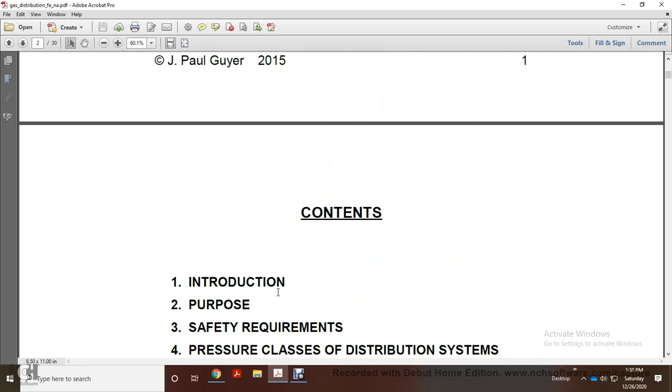The contents of this intro to gas distribution: introduction, purpose, safety requirements, pressure classes of distribution systems, system planning, materials and equipment, miscellaneous plans and engineering data, gas distribution systems design.

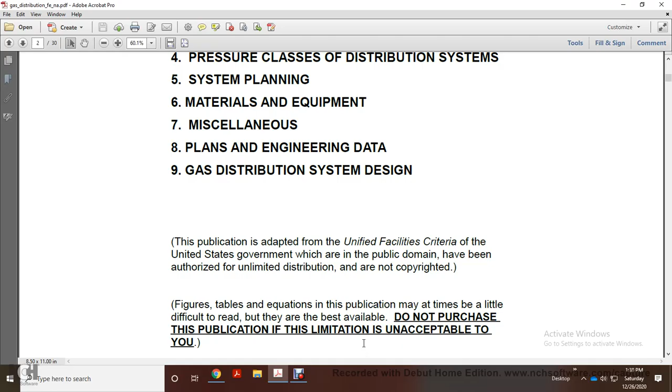This public document is adapted from Unified Facilities Criteria of the United States Government, public domain, authorized for unlimited distribution and not copyrighted. The tables, equations, publications are many times a little difficult to read, but they are the best available. Do not purchase this publication if this limitation is unacceptable to you.

Introduction: this publication contains instruction and engineering information relating to gas distribution piping systems, including pressure regulators, valves, meters, and other necessary appurtenances for the distribution of fuel gas, natural and manufactured, from the point of delivery by the gas supplier to the point of connection with the building piping.

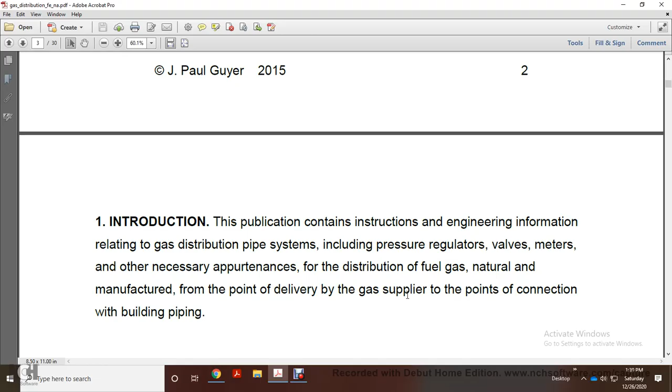2. The purpose: the guidance furnished is for designing a new gas distribution system, checking the adequacy of the design furnished by the gas suppliers, or analyzing an existing system to determine the adequacy of supplying the demands of proposed additions.

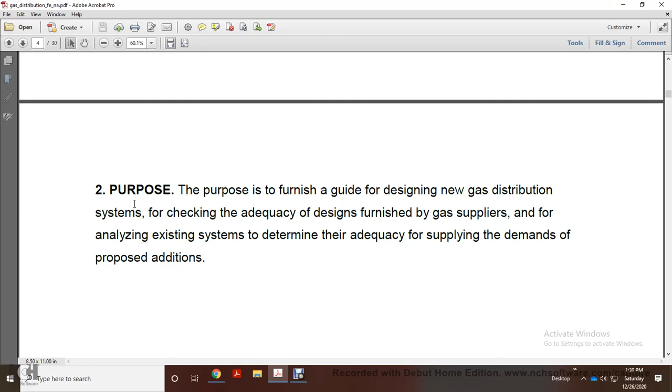Alright, 3. Safety requirements. The design will include safety requirements of ANSI B31.8, including guidance for abandoned gas lines. The requirements of ANSI B31.8 are adequate for safety under conditions normally encountered in the gas industry. Requirements for abnormal and unusual conditions cannot be specifically provided in this publication, nor all the details of engineering prescribed.

Alright, 4. Pressure class of the distribution system. Low pressure system. In a low pressure gas distribution system, the gas pressure in the mains and service lines is substantially the same as that delivered to the user appliances. In such a system, service regulators are not required for the individual service lines. So, once again, your low pressure system is a gas distribution system with the mains and service lines substantially the same as delivered to the using appliances. In such a system, the service regulator is not required on individual service lines.

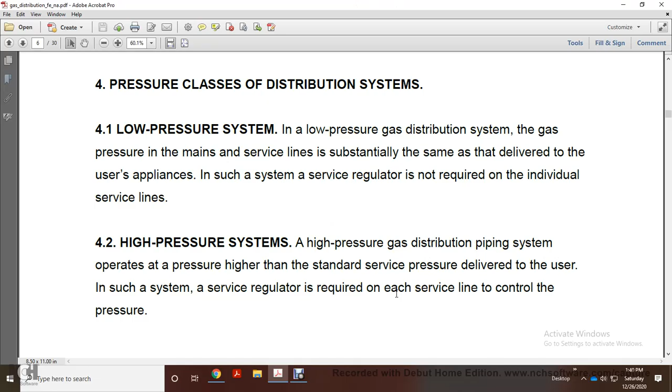High pressure system. A high pressure gas distribution system operates at a pressure higher than the standard service pressure delivered to the user. In such a system, a service regulator is required on each service line to control the pressure.

Alright, 5. System planning layout. The gas distribution system will be planned carefully with due consideration to economy, safety, and uniformity of pressure. The lines will be well looped in the main area and outlying areas whenever practical and economically feasible to do so. It's not always practicable to loop a supply line to an outlying area and then back into the main system, but in such cases, the objectionable effects of dead ends can often be relieved to some extent by looping such a line around the area served and then back into itself.

At a large station it will usually be advantageous to extend the high pressure line to provide 2 or more connections with distribution lines for the purpose of uniformity and assurance of adequate pressure.

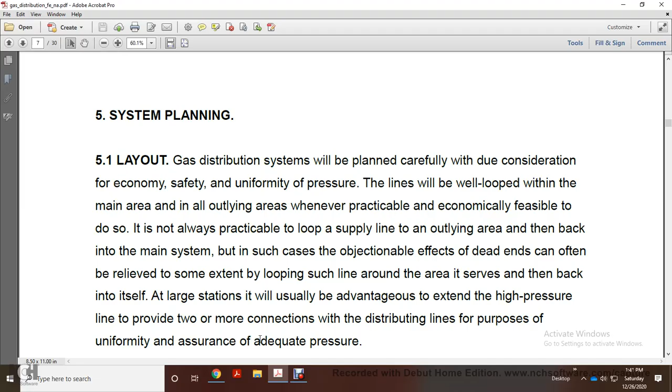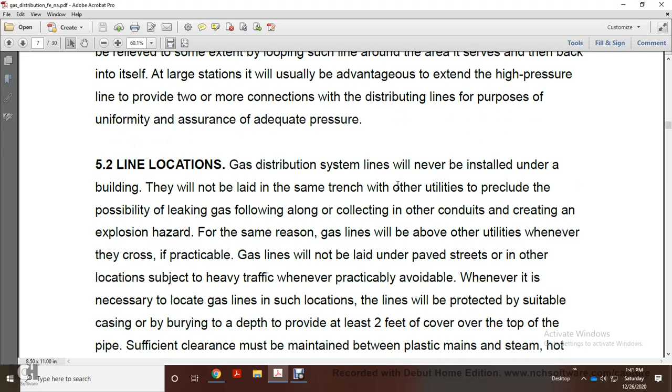5.2. Line locations. Gas distribution system lines will never be under a building. They will never be laid in the same trench with other utilities, precluding the possibility of leaking gas following along and collecting in other conduits, creating an explosive hazard. For the same reason, gas lines will be above other utilities whenever they cross.

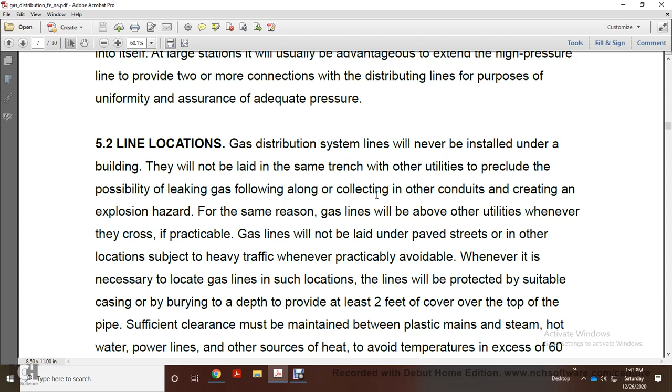If practical, gas lines will not be laid under paved streets or in any other location subject to heavy traffic. Whenever it is necessary to locate gas lines in such a location, lines will be protected with a suitable casing or buried to a depth providing at least 2 feet of cover over the top of the pipe.

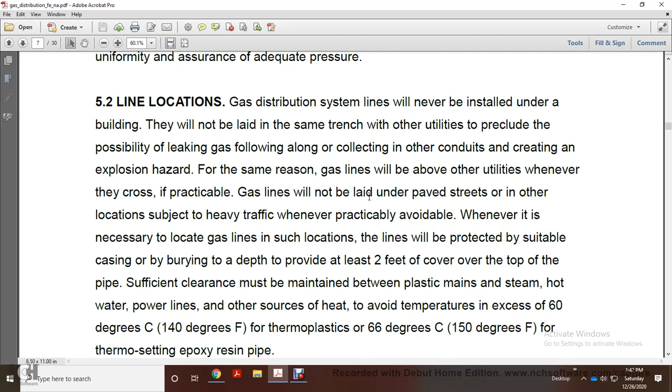Sufficient clearance must be maintained between plastic lines and plastic mains and steam, hot water, power lines, and other sources of heat to avoid temperatures in excess of 60 degrees Celsius, which would be 140 degrees Fahrenheit, for thermoplastics, and 66 degrees Celsius, 150 degrees Fahrenheit, for thermosetting epoxy resin pipe.

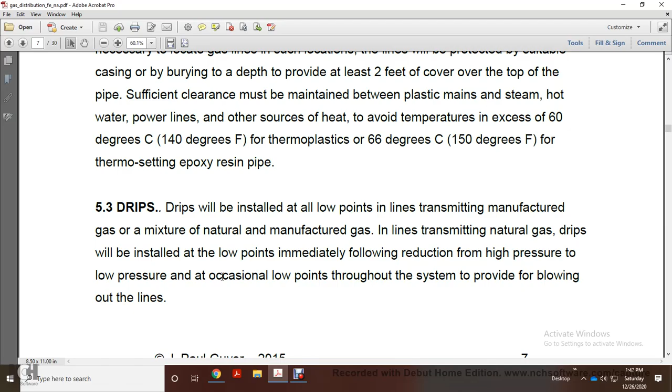Occasional low points throughout the system will be provided for the blowing out of the lines. Alright, 5.4, grading lines. Gas mains will be buried deep enough to provide at least 2 feet of cover over the top of the pipe.

When manufactured gas is used, the lines will be uniformly graded to drain low points, preventing formation of pockets where condensate could restrict the flow of gas. Lines transmitting natural gas need not be graded, but may follow the contour of the ground surface.

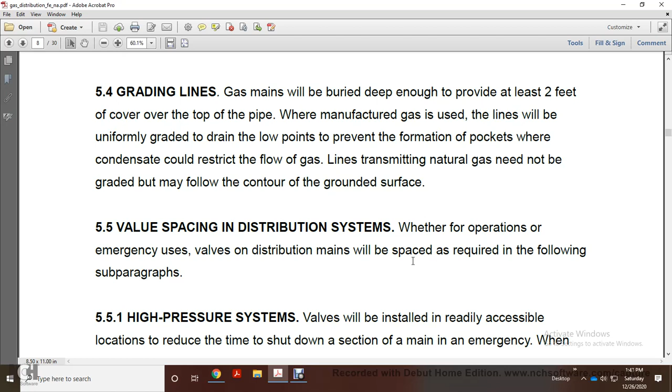5.5, valve spacing in distribution systems. For operation and emergency use, valves on distribution mains will be spaced as required in the following subparagraphs. 5.5.1, high pressure systems. Valves will be installed in readily accessible locations to reduce the time of shutdown of a section of the main in an emergency. When determining spacing of the valves, consideration should be given to the operating pressure.

When determining spacing of the valves, consideration should be given to the operating pressure and size of the mains and local physical conditions, as well as the number and type of users or services affected by a potential shutdown. Alright, 5.5.2, low pressure systems. Valves are required in a low pressure system only to meet conditions given in paragraph 1.6 below.

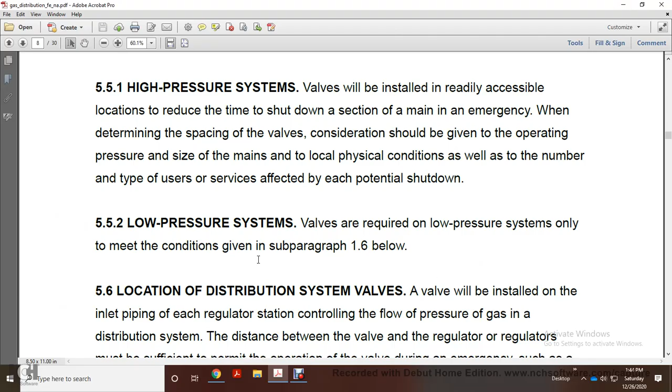5.6, location of distribution system valves. A valve will be installed on the inlet piping of each regulator station controlling the flow or pressure of the gas in a distribution system. Distance between the valve and the regulator or regulators must be sufficient to permit operation of the valve during an emergency, such as a large gas leak or fire in the regulator station.

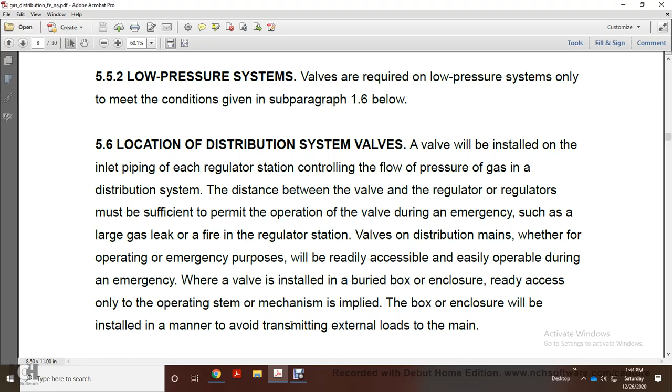Valves on distribution mains, whether for operating or emergency purposes, will be readily accessible and easy to operate during an emergency. When the valve is installed and buried in a box or enclosure, ready access to the operating stem and mechanism is implied. The box or enclosure will be installed in a manner to avoid transmitting external loads to the main.

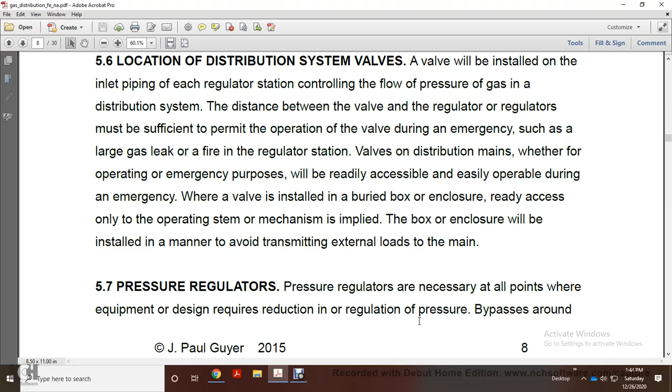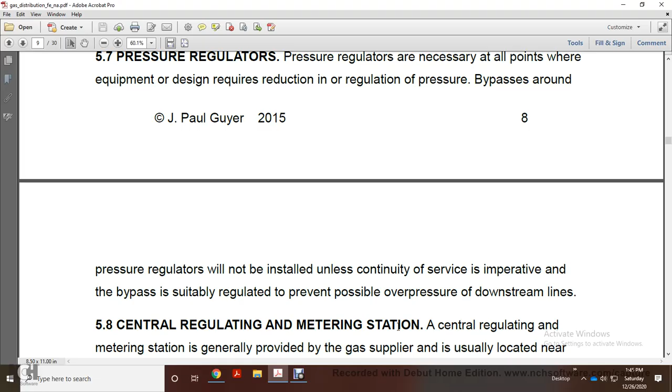5.7, pressure regulators. Pressure regulators are necessary at all points wherever the equipment design requires reduction and regulation of pressure. Bypasses around pressure regulators will not be installed unless continuity of service is imperative, with the bypass suitably regulated to prevent possible overpressure of the downstream lines.

Alright, 5.8, central regulating and metering station. The central regulating and metering station is generally provided by the gas supplier, usually located near the entrance of the reservation. When provided by the owner, all necessary equipment will comply with the requirements of the gas supplier, and the enclosure, if required, will be of fire-resistant construction such as masonry. Adequate provisions will be made for ventilation, with the enclosure design coordinated with the using agency. A gas supplier valve may be installed in the main supply line approximately 100 feet ahead of the station.

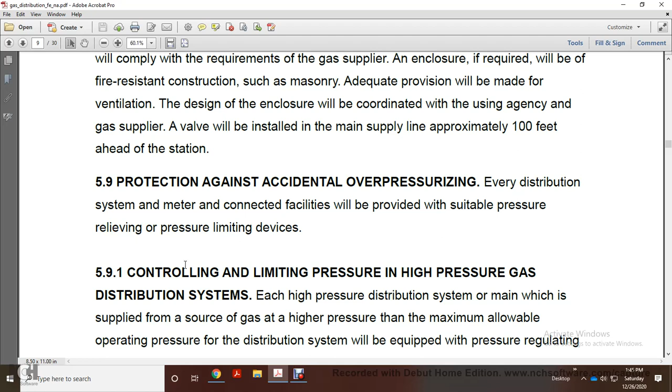5.9, protection against accidental overpressurizing. Every distribution system or meter of the connected facility will be provided with a suitable pressure relieving or pressure limiting device. 5.9.1, controlling and limiting pressure in high pressure gas distribution systems. Each high pressure distribution main which is supplied from a source of gas at higher pressure than the maximum allowable operating pressure of the distribution system will be equipped with a pressure regulating device of adequate capacity, designed to meet the pressure, load, or other service conditions under which it may operate or be subjected.

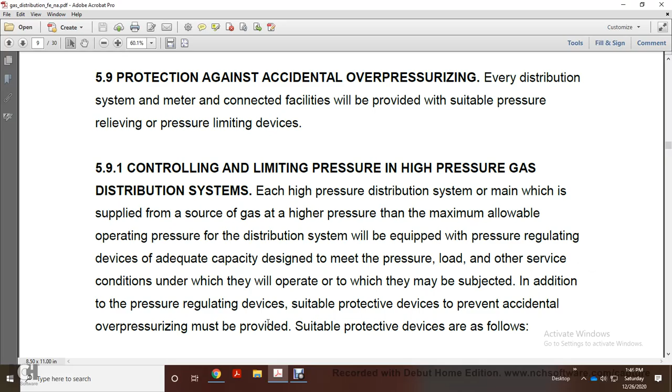In addition to the pressure regulating device, a suitable protective device to prevent accidental overpressuring must be provided. Suitable protective devices are as follows: spring-loaded relief valves conforming with the American Society of Mechanical Engineers Boiler and Pressure Vessel Code, Section 8, Division 1. Pilot-loaded back pressure regulators used as relief valves, designed so that failure of the pilot system or control line will open the regulator.

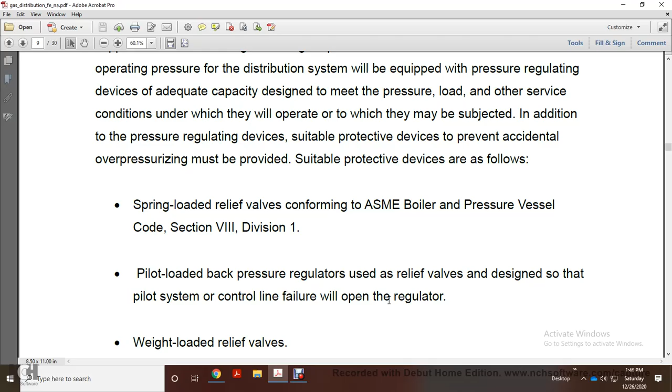Weight-loaded relief valves. A monitoring regulator installed in series with the primary pressure regulator. A series regulator installed upstream of the primary regulator so as to continuously limit the pressure on the inlet of the primary regulator to the maximum allowable operating pressure of the distribution system or less. An automatic shut-off device installed in series with the primary pressure regulator, set to shut off when the pressure of the distribution system reaches the maximum operating pressure or less.

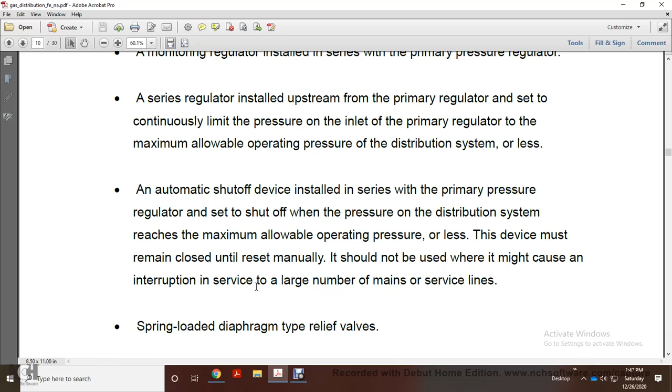The device must remain closed until reset manually. It should not be used if it might cause an interruption of service to a large number of mains or service lines. Spring-loaded diaphragm type relief valves.

Alright, 5.9.2, controlling and limiting pressure in low pressure gas distribution systems. Each low pressure main supplied from a gas source at higher pressure than the maximum allowable operating pressure for a low pressure system will be equipped with a pressure regulating device of adequate capacity. Other devices will be designed to meet the pressure, load, and other service conditions in which they may operate.

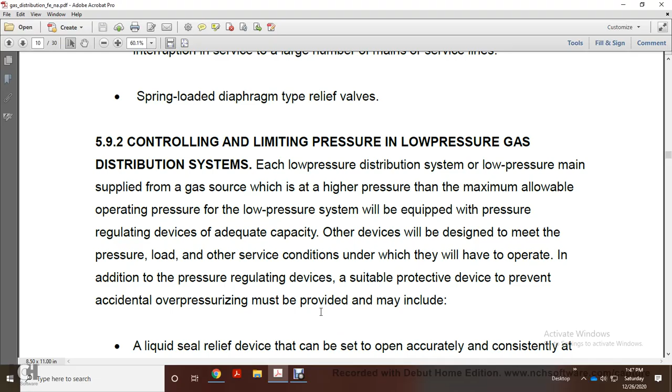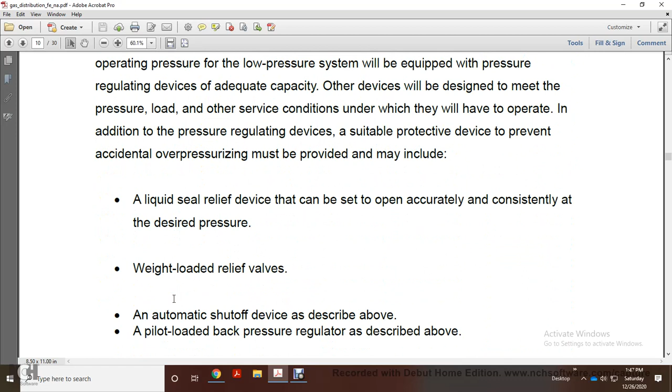In addition to the pressure regulating device, a suitable protective device to prevent accidental overpressuring must be provided and may include: a liquid seal relief device that can be set to open accurately and consistently at the desired pressure, weight-loaded relief valves, the automatic shut-off valve described above, pilot-loaded back pressure regulators described above, monitoring regulators described above, and series regulators as described above.

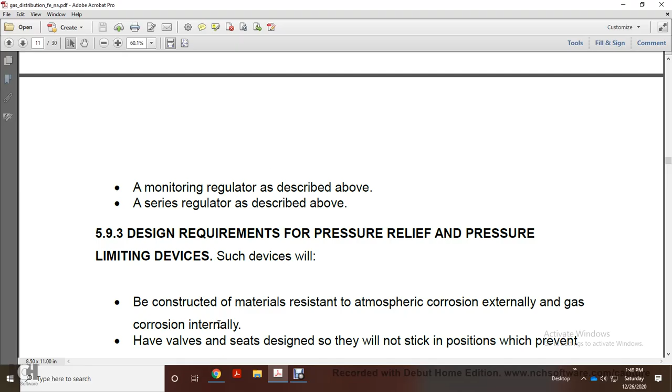5.9.3. Design requirements for pressure relief devices and limiting devices. Such devices will be constructed of materials resistant to atmospheric corrosion externally and gas corrosion internally. They will have valves and seats designed so they will not stick in positions which prevent the device from operating properly. They may be designed and installed with ease of maintenance for checking leakage, pressure rate, actuation, and free valve movement.

5.9.4. Telemetering and recording gauges. 5.9.4.1: each distribution system supplied by more than one district pressure regulating station must be equipped with telemetering recording pressure gauges to indicate the gas pressure in the district line.

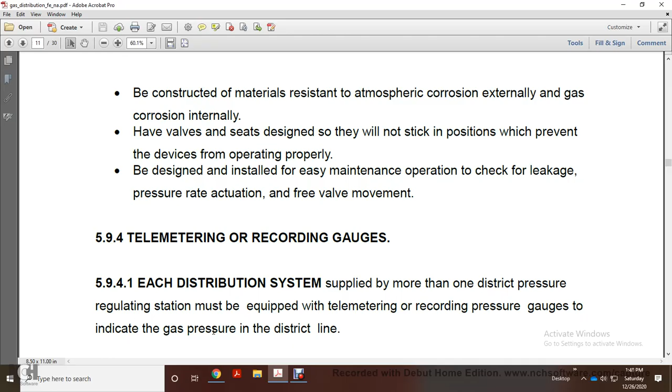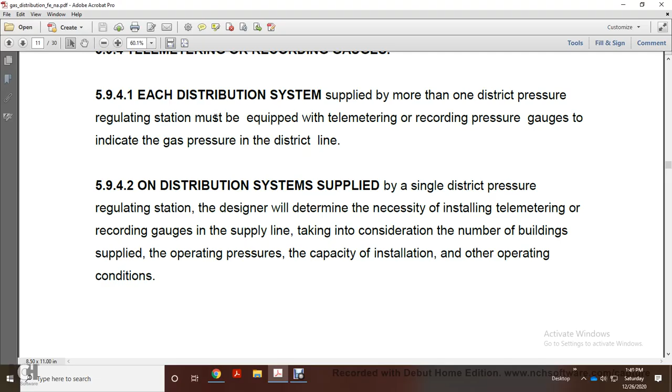5.9.4.2: on a distribution system supplied by a single district pressure regulating station, design should determine the necessity of installing a telemetering recording gauge on the supply line, taking into consideration the number of buildings, supply operating pressure, capacity, installation, and other operating conditions.

6. Materials and equipment. General requirements: materials and equipment that become permanent components of the gas distribution system must be suitable and safe for the conditions of the locality in which they are installed. The minimum components will meet the requirements of Title 49 Code of Federal Regulations 192.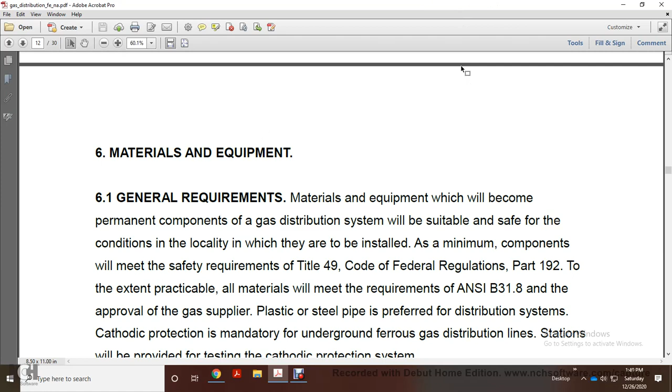To the extent practical, all materials will meet the requirements of ANSI B31.8 and have the approval of the gas supplier. Plastic or steel pipe is preferred within the distribution system. Cathodic protection is mandatory for underground ferrous gas distribution lines. Stations will be provided for testing the cathodic protection system.

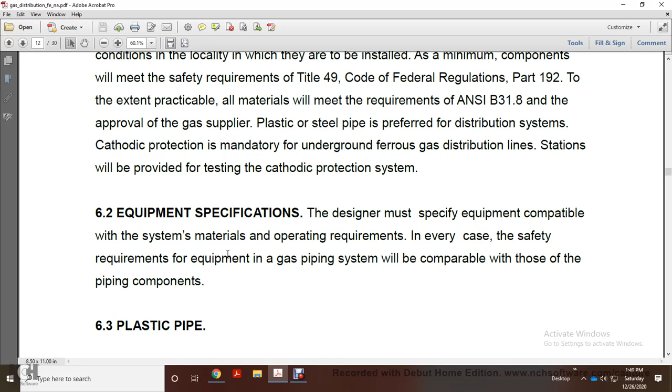6.2 Equipment specifications: the designer must specify equipment compatible with the specific system materials and operating requirements in every case. Safety requirements for the equipment of the gas piping system will be comparable with those of the piping components.

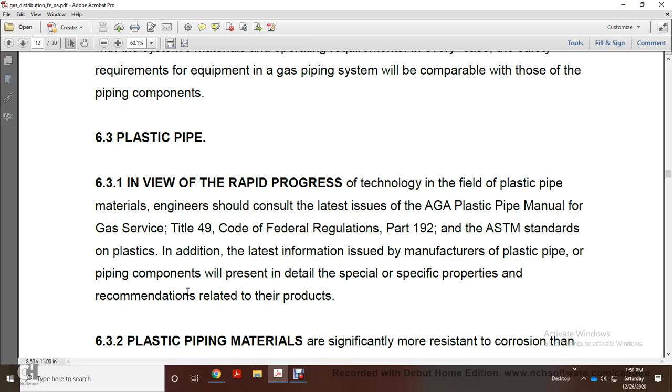6.3 Plastic pipe: in view of the rapid progress of technology in the field of plastic pipe materials, engineers should consult the latest issue of the AGA Plastic Pipe Manual for Gas Service, Title 49 Code of Federal Regulations Part 192, and ASTM Standards on Plastics. In addition, the latest information issued by the manufacturer of plastic pipe and piping components should be consulted for specific properties and recommendations related to the products.

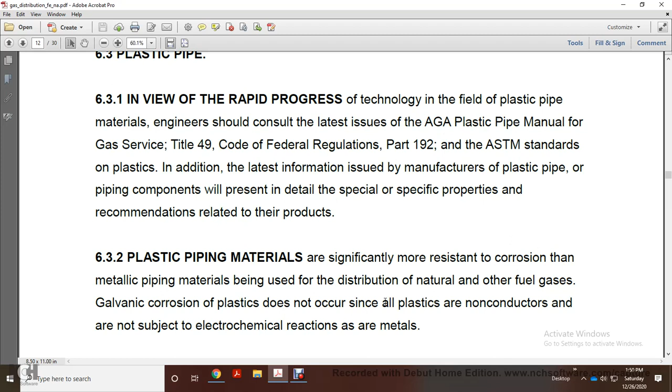6.3.2. Plastic piping materials are significantly more resistant to corrosion than metallic piping materials used in distribution of natural and other fuel gases. Galvanic corrosion does not occur in plastic since all plastics are non-conductors and are not subject to electrochemical reactions as metals are.

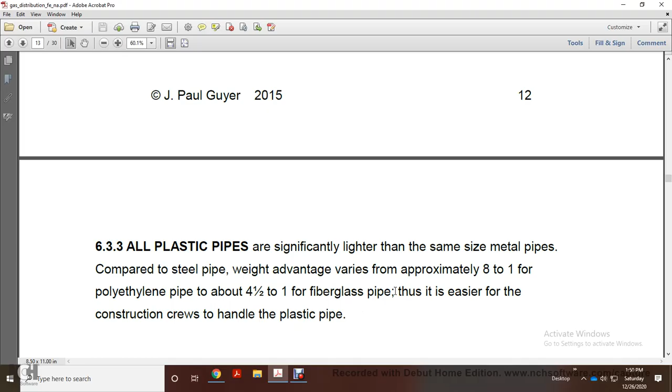6.3.3. All plastic pipes are significantly lighter than the same size metal pipe. Compared with steel pipe, the weight advantage varies approximately 8 to 1 for polyethylene pipe and about 4.5 to 1 for fiberglass pipe, making it easier for construction crews to handle the plastic pipe.

7. Miscellaneous. 7.1 Odorization: a suitable malodorous agent is injected into any gas which does not possess a natural distinctive odor, for the purpose of detecting leaks. Unless the gas supply line has already been odorized by the gas supplier, it will be necessary to provide facilities for injecting malodorant.

A storage tank with a control device injecting the odorization agent at a rate proportional to the gas flow, determined by pressure drop across an orifice, will be required. The point of injection will be on the downstream side of the central regulating metering station. Recommendations can usually be obtained from the gas supplier regarding the type and quantity of malodorant for use in the suitable injection system.

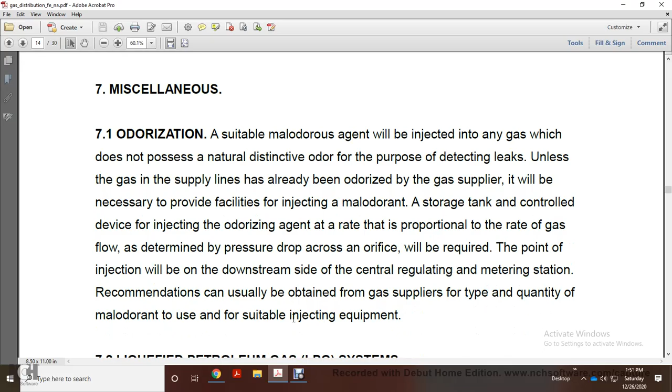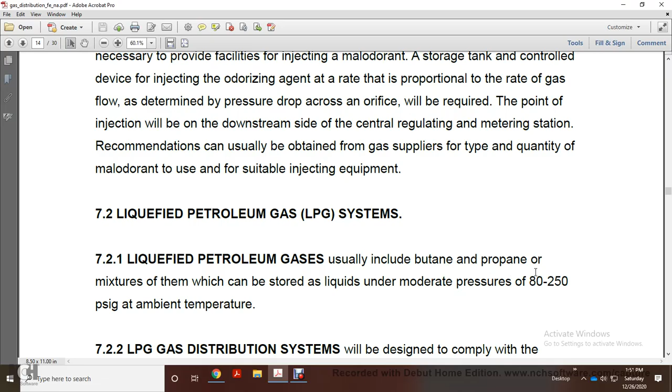7.2 Liquefied petroleum gas, or LPG, systems. Liquefied petroleum gas usually includes butane, propane, or a mixture of them, which can be stored as a liquid under moderate pressures of 80 to 250 psig at ambient temperature.

Liquefied petroleum gas distribution systems are designed to comply with the requirements of the National Fire Protection Association 58, instead of ANSI B31.8. Polyethylene and fiberglass will not be used in liquefied petroleum gas systems.

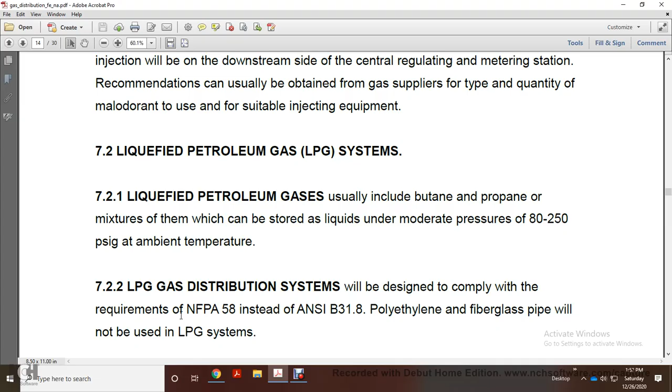8. Plans and engineering data. Plans will include layout drawings showing the entire distribution system, detailed drawings clearly showing pipe size, locating gas mains, service connections, details, abandoning pipes, valves, and regulators.

ANSI B31.8 requires abandoned gas lines to be physically disconnected from the gas sources. Shut-off valves are not an acceptable means of disconnection.

8.2 Engineering analysis: the engineering analysis will be in diagram form showing all connected loads, flow quantities, pressure, and location of regulators. Supporting calculations will be prepared as needed.

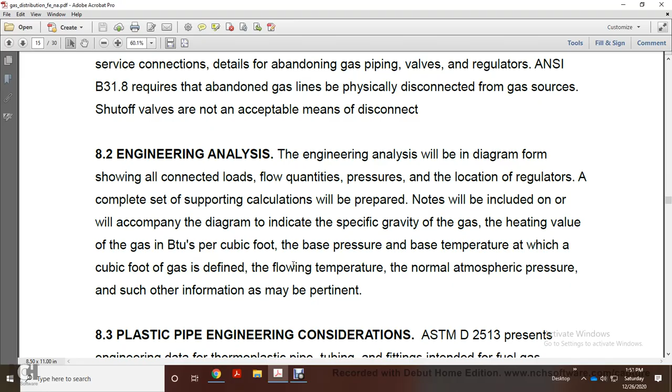Notes will be included on, or will accompany, the diagram indicating the specific gravity of the gas, heating value of the gas in BTUs per cubic foot, base pressure, base temperature at which the cubic foot of gas is defined, the flowing temperature, the normal atmospheric pressure, and such other information as may be pertinent.

8.3 Plastic pipe engineering consideration. The American Society for Testing and Materials D2513 presents engineering data for thermoplastic piping, tubing, and fittings intended for fuel gas service.

The American Society for Testing and Materials D2517 presents engineering data for fiberglass pipe and fittings, including adhesive joints, for fuel gas service. The ASTM D3350 covers the identification of polyethylene plastic pipe and fittings materials using a cell classification system.

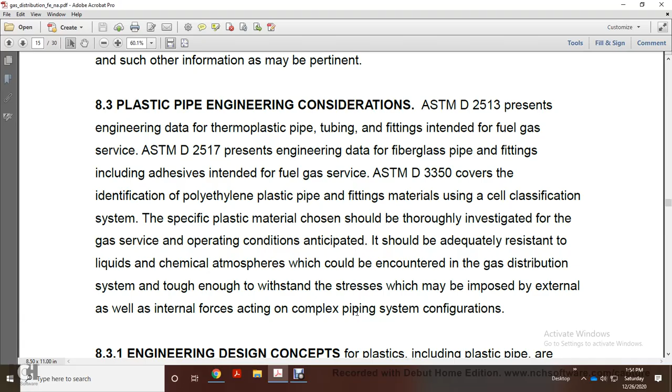The specific plastic material should be thoroughly investigated for the gas and the operating conditions anticipated. It should be adequately resistant to liquid and chemical atmospheres which could be encountered within the gas distribution system, and tough enough to withstand stresses which may be imposed by external as well as internal forces acting on complex piping system configurations.

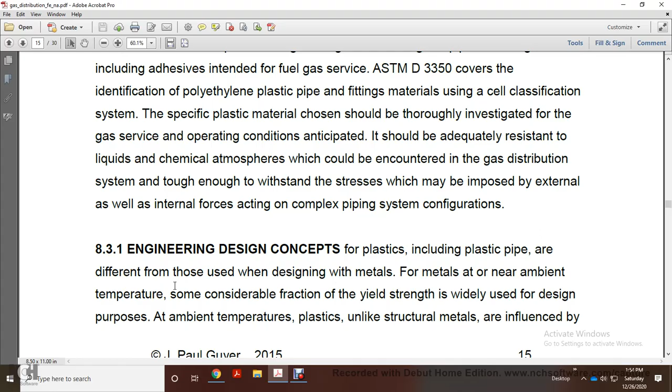8.3.1, Engineering Design Concept. Plastic pipes differ from those used when designing with metals. For metals at ambient temperature, some considerable fraction of the yield strength is widely used for design purposes. At ambient temperature, plastics, unlike structural metals, are influenced by duration of stress, with relatively small changes in temperature.

Therefore, the design stress level of plastics is based on long-term strength, measured by plotting stress versus failure as a function of time at constant temperature. On a short-term strength basis, the design stress level for plastics would be relatively low.

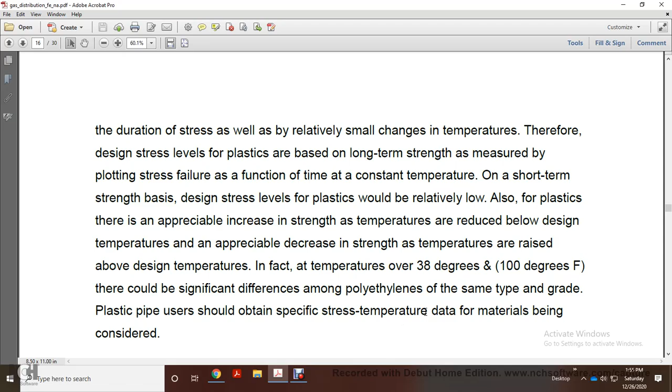Plastics show appreciable increased strength as temperature is reduced below the design temperature, and an appreciable decrease in strength as temperatures are raised above the design temperature. At temperatures over 38 degrees or 100 degrees Fahrenheit, there could be significant differences among polyethylenes of the same type or grade. Plastic pipe users should obtain specific stress-temperature data for the material being considered.

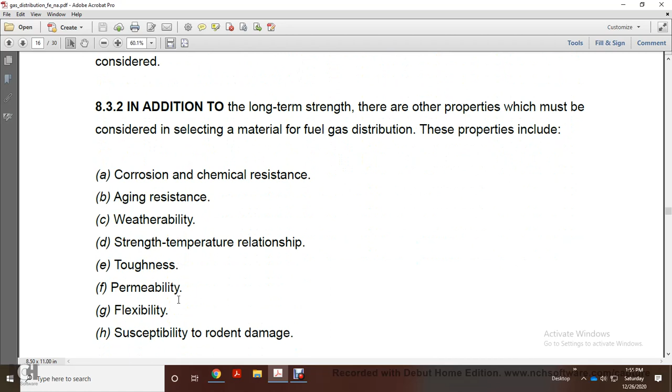8.3.2. In addition to long-term strength, there are other properties which must be considered when selecting material for fuel gas distribution. These properties include corrosion, chemical resistance, aging resistance, weatherability, strength-temperature relationship, toughness, permeability, flexibility, and susceptibility to rodent damage. With all these properties important, it must be considered that only the long-term strength can be defined well enough at present to be used as the primary basis for design.

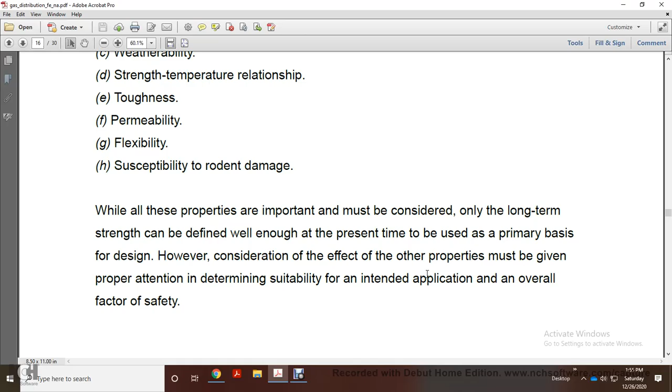However, consideration must be given to the other properties with proper attention, to determine suitability for the intended application and the overall factor of safety.

8.3.3. When selecting a plastic piping system, the design engineer should relate the installation and service requirements to the characteristics of the several plastic systems available.

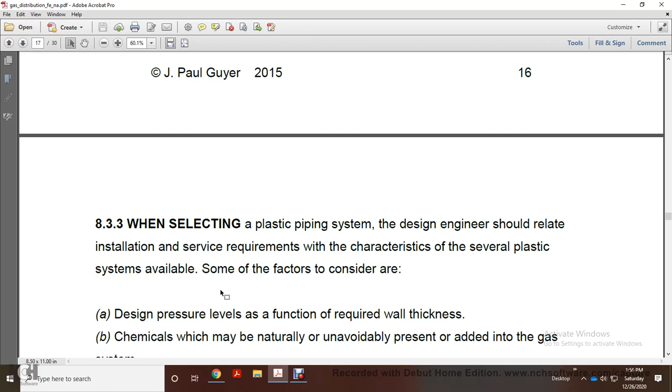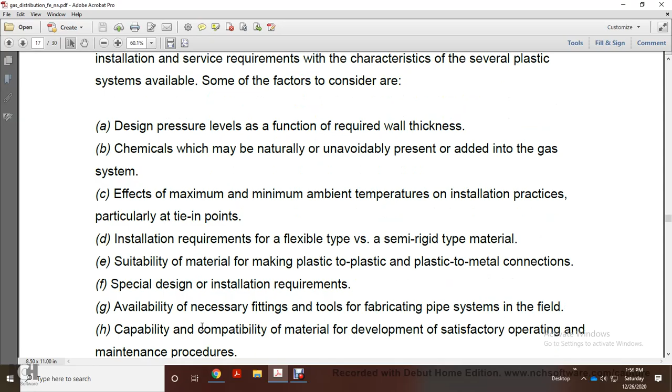Some factors to be considered are: design pressure level, the function required, wall thickness, chemicals which may naturally be present or added into the gas system, maximum and minimum ambient temperature effects, installation practices particularly at tie-in points, installation requirements, flexible type versus semi-rigid type material, suitable material for making plastic-to-metal connections, special design or installation requirements available, necessary fittings and tools for fabricating the piping system in the field, compatibility of the materials, and satisfactory operation and maintenance procedures.

9. Gas Distribution System Design. Introduction: The design of the gas distribution system will be based on the maximum probable demand, equivalent to not less than 80% of the full maximum possible connected appliance load. Actual consumption may never be equal to the maximum probable.

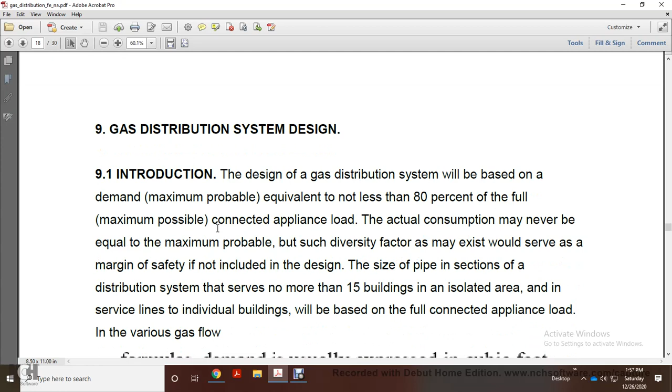Such a diversity factor may exist which would serve as a margin of safety, if not included in the design of the site or section, for a distribution system serving no more than 15 buildings in an isolated area. The service line to individual buildings will be based on the full connected appliance load and various gas flow.

The formula demand is usually expressed in cubic feet per hour.

Because of the variability of the volume of gas with changes in pressure and temperature, and the need for a finite basis, pressure and temperature must be expressed in quantities volumetrically, essentially defining the state characteristics of the gas. For computations connecting the appliance load with the flow formulas used for design of the piping system, all should be on the same basis, using base conditions of 60 degrees Fahrenheit and 14.73 psia, according to AGA Orifice Metering of Natural Gas Report Number 3.

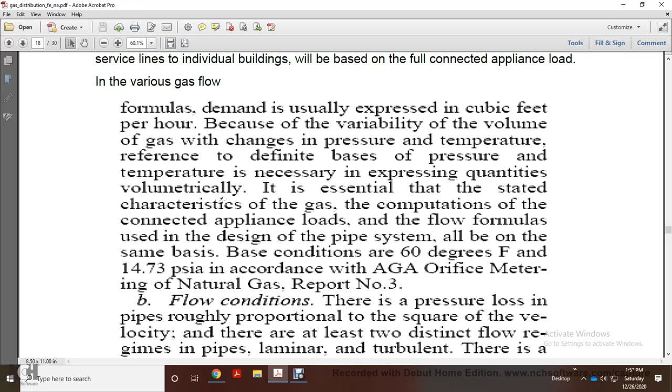Flow conditions: there is a pressure loss in pipes that is roughly proportional to the square of the velocity. And there are at least two distinct flow regimes in pipes: laminar flow and turbulent flow.

There is a distinctive discontinuity in the behavior of the fluid where laminar flow rates are exceeded, with a large region of mixed flow behavior. Partially turbulent flow exists between the upper limit of laminar flow and the onset of fully developed turbulent flow. The exact transition regions between the various flow regimes are not yet accurately predictable for various gas piping situations.

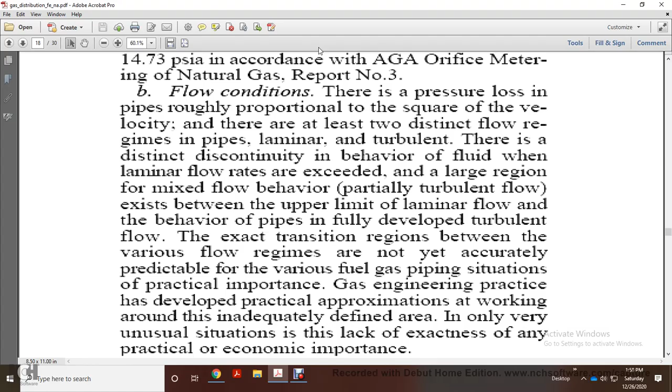For practical importance, gas engineering practice has developed practical approximations for working around this inadequately defined area. It is only in very unusual situations that the lack of exactness has any practical economic importance.

This is the basis for other military facilities with unpredictable loads. The most compelling problem with distribution system design is the infrequency of system operation at or near design capacity.

Regarding the flow of natural gas in pipelines: plastic pipes are very smooth, slippery surfaces with friction resistance considerably less than that of steel pipe. Therefore, it is often assumed that plastic pipe has significantly more flow capacity than steel pipe.

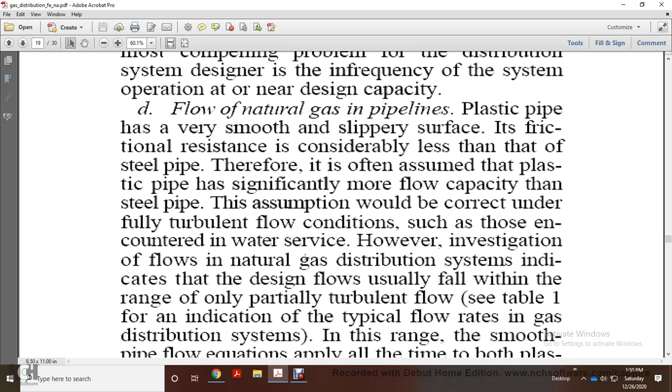This assumption would be correct under fully turbulent flow conditions, such as encountered in water distribution. However, natural gas distribution design flows usually fall within the range of only partial turbulent flow. See Table 1 for typical flow rates for gas distribution. In this range, the smooth-pipe flow equations apply for both plastic and steel.

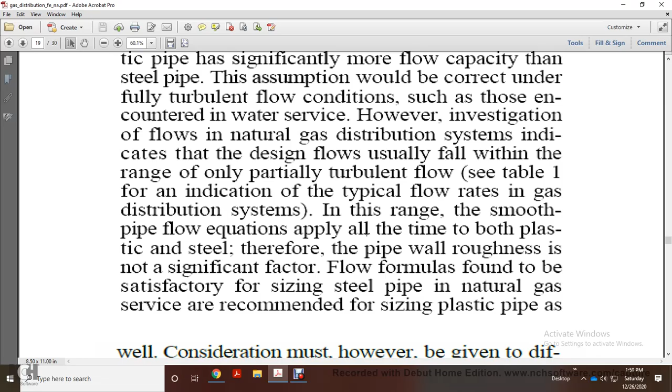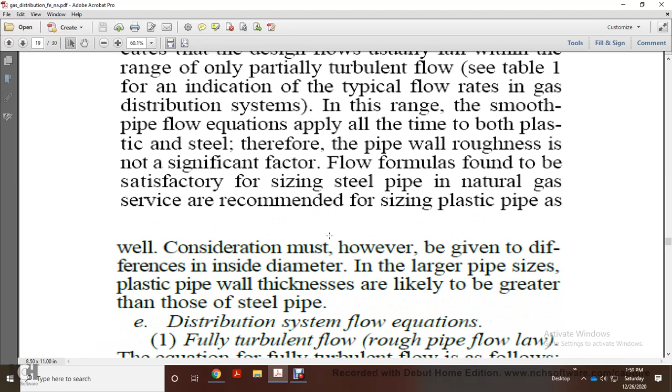Therefore, pipe roughness is not a significant factor. The flow formula is found to be satisfactory for sizing steel pipe, in natural gas service, is recommended for sizing plastic pipe as well. Consideration must be given, however, to the difference in inside diameter for larger plastic pipe sizes, as wall thickness is likely to be greater than that of steel pipe.

Distribution system flow equations: fully turbulent flow, or rough pipe flow law. The equation for fully turbulent flow is as follows.

This equation covers partially turbulent flow, or smooth pipe flow law. Any of the accepted gas flow equations used with steel pipes, such as the Mueller, Pole, and IGT distribution equations, could also be used for calculating plastic pipe flow capacity.

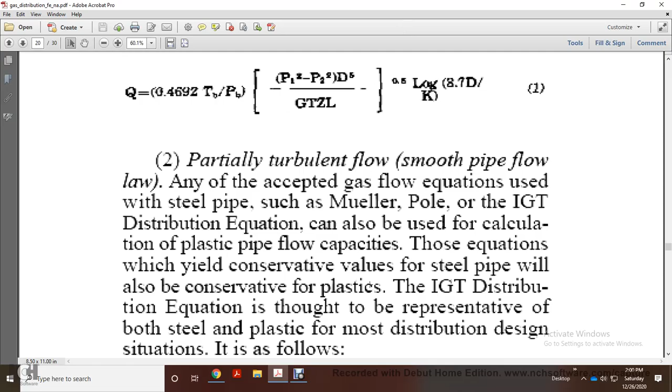These equations yield conservative values - the steel pipe equations will be conservative for plastic. The IGT distribution equation is thought to be representative of both steel and plastic for most distribution design situations, as follows.

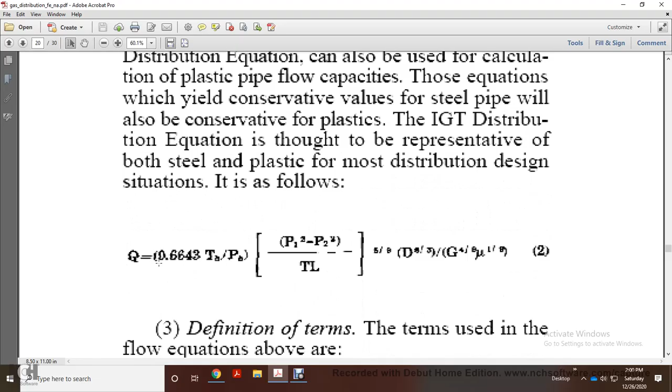It shows Q is equal to 0.6643 times T, and here's the definition of terms. D is the inside pipe diameter, G is the specific gravity, and L is the length of the pipe section.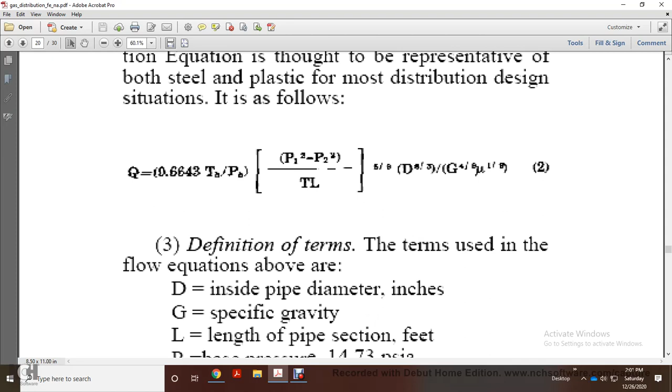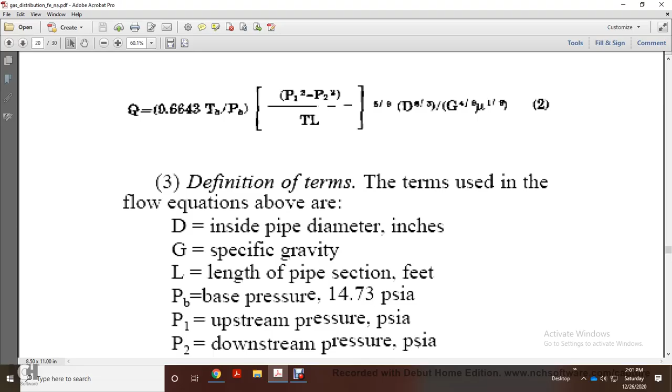PB is base pressure at 14.73 psi. P1 is upstream pressure in psi, P2 is downstream pressure in psi. Q is gas flow rate in MSCFH, thousands of standard cubic feet per hour. TB is base temperature, 520 Rankine. T is average temperature of flowing fluid, and Z is the average compressibility factor.

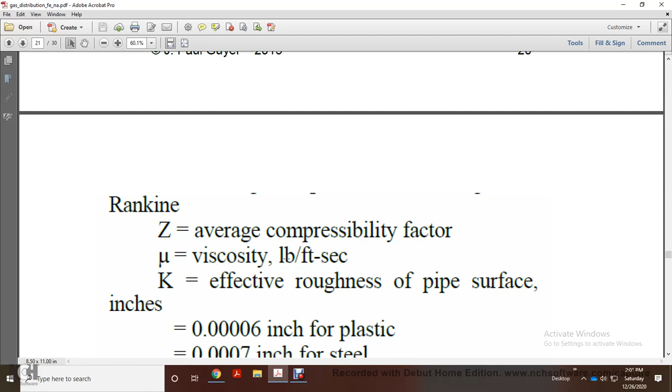This mu represents viscosity in pounds per foot-second. K is the effective roughness of the pipe surface in inches, and that equals 0.00006 for plastic, 0.0007 for steel, and 0.01 for cast iron.

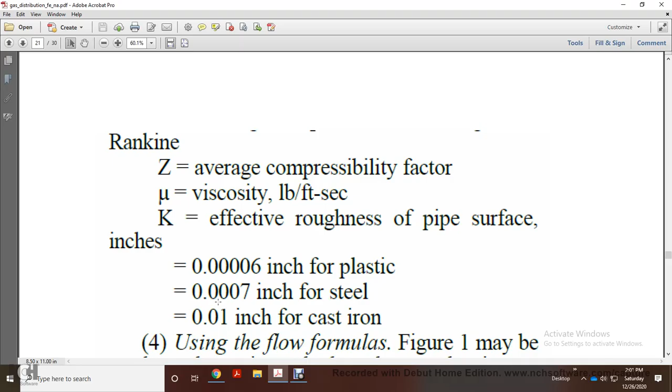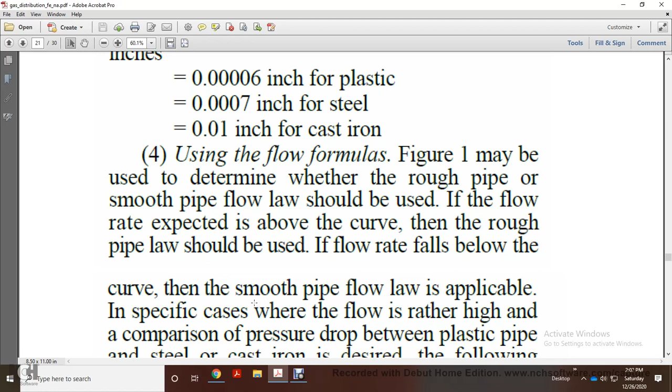The following is suggested: determine whether the partially or fully turbulent flow formulas are applicable using Figure 1, given flow and pipe size. Figure 1 shows the range where the smooth pipe flow law equation, or laminar flow equation for partially turbulent flow, applies for steel, cast iron, and plastic pipe.

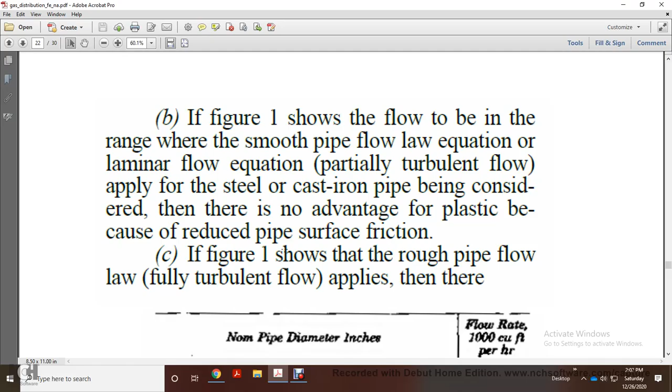In this consideration there is no advantage to plastic because of the reduced pipe surface friction. Where Figure 1 shows the rough pipe flow, or fully turbulent flow, applies instead.

There you have your nominal pipe diameter in inches: 2, 3, 4, 6, and 10, and your flow rate in 1,000 cubic feet per hour.

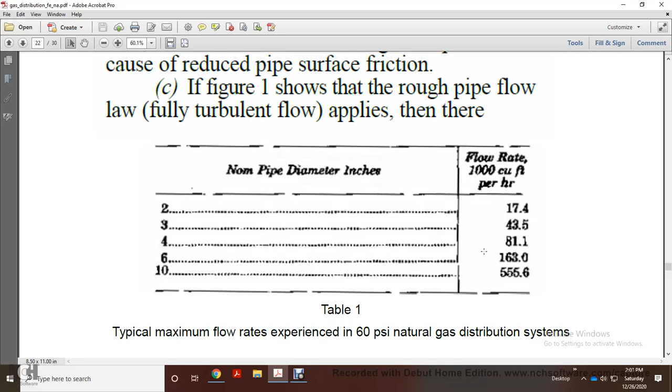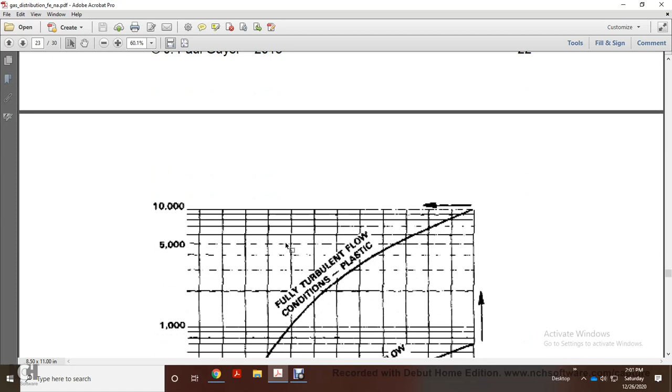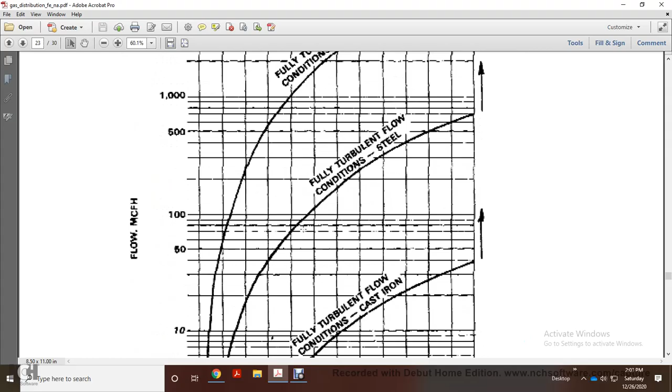Typically, the maximum flow rates experienced are in 60 psi natural gas distribution systems. This shows your flow rate under fully turbulent flow conditions for plastic, fully turbulent flow conditions for steel, and fully turbulent conditions for cast iron, based upon the IGT distribution system.

Fully turbulent equation K values: 0.01 for cast iron, 0.0007 for steel, and 0.00006 for plastic. Gravity at 0.60, and viscosity at 0.105.

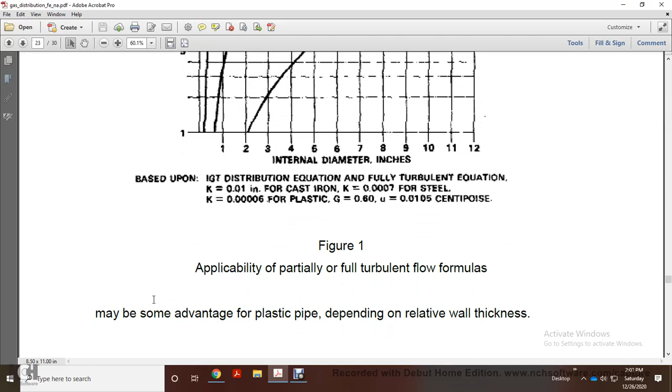Applicability of partial and fully turbulent flow formulas: there may be some advantage to plastic pipe depending on the relative wall thickness.

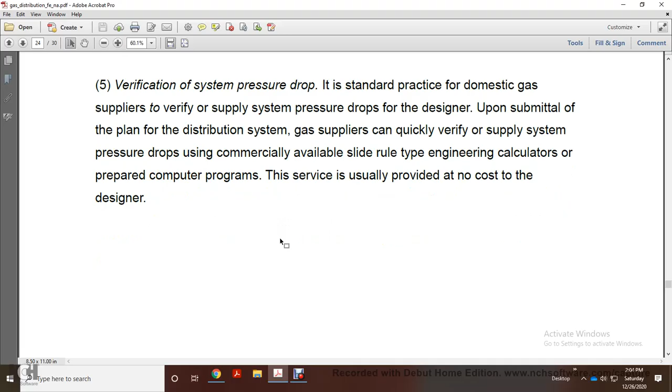And then we'll cut the tape there because I'm going to take the quiz.

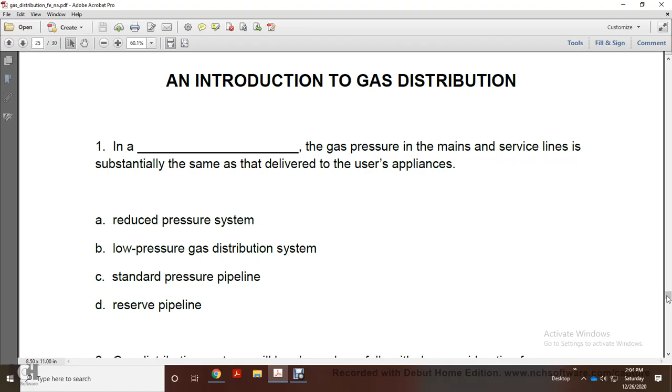And this was a reading from an introduction to gas distribution.